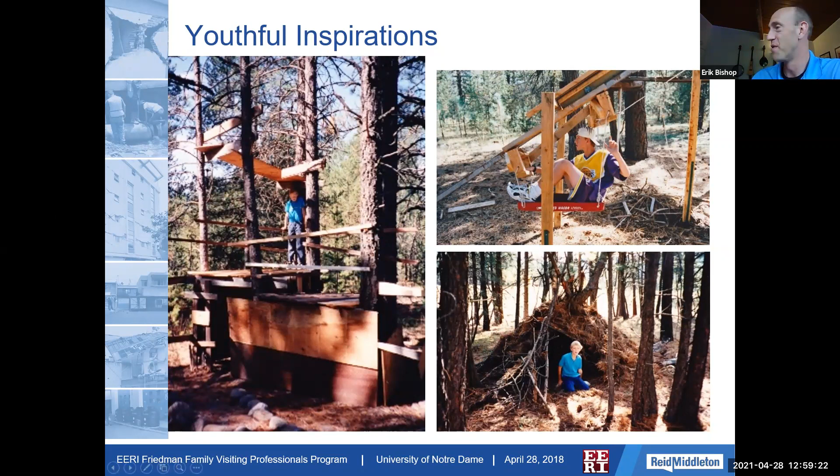It was actually way too steep and pretty dicey and dangerous, but the photo's cool - I was probably age 12. So I evolved to go into civil engineering in undergrad at University of Idaho, with a structural engineering focus, where whenever the topic of earthquakes came up, it was 'we don't talk about that here, you go to the West Coast if you're worried about that.'

So it was kind of interesting because they essentially, in my recollection at least, punted on anything post-linear behavior. It was a mind-blowing experience when I transitioned to get a master's at the University of Washington, where our entire focus - in essentially the context of everything we discussed, technical and conceptual - was really around earthquakes, dynamics, nonlinear behavior, ductility, et cetera.

And so I transitioned there to Reid Middleton, where I've been for about well over a decade, 12, 13 years. We're a relatively small employee-owned civil structural engineering firm. We do a lot of seismic upgrade work, as I think the bio illustrated, with 3 offices. If anyone is interested, graduating, looking for a job, feel free to reach out - we're definitely looking for people.

So that's really the evolution of how I got here, and most of these reconnaissance trips have been while I was at Reid Middleton.

The first one I'll share was actually while I was a master's student at the University of Washington, I had the opportunity to organize a team through some colleagues.

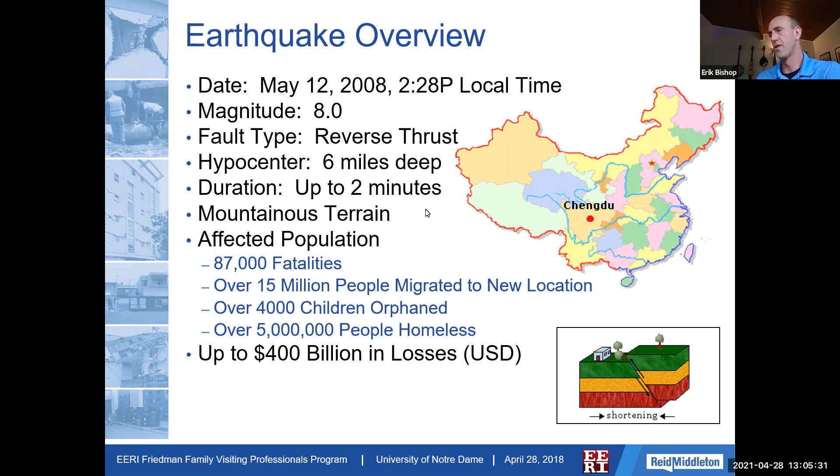So there are a couple of quick case study examples burned into my brain from that 2008 experience. One is a school building we saw, a typical 4-story middle school building with a rectangular footprint. It was a very representative type of building compared to other schools in the area. Constructed in 2006, it was essentially a brand new school building.

Sorry about that, my mouse or something just started going wild on its own.

Constructed with confined masonry, which is a system where they build the masonry walls and then pour in a concrete frame around it, a column and ring beam that confines the masonry. Even though it's unreinforced masonry, it actually has some energy dissipating capacity because the bricks are forced to rub against each other as it experiences lateral motion.

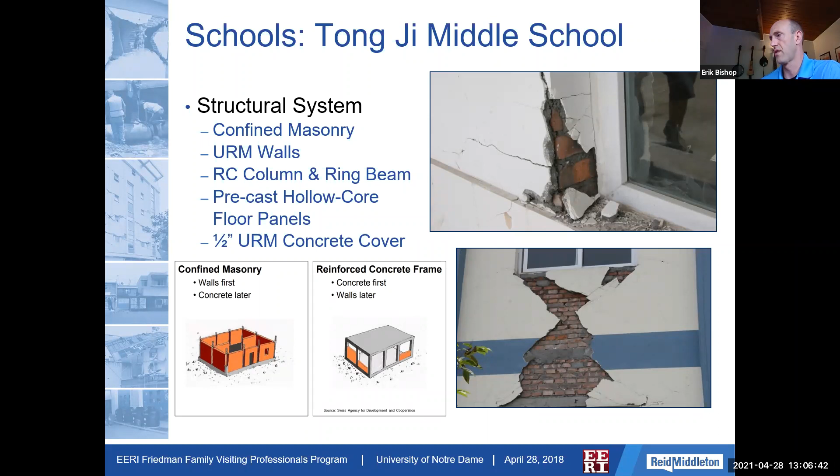So here's a type of construction they used for this building. You can also see there's some plaster on the surface that was added.

Essentially I would characterize this as a life safety level of performance. There's some shear cracks in the masonry walls, not unexpected, in these coupling beam sections, spandrel beams, and the masonry infill, stereotypical X-cracking. All the students got out of the building safely, certainly had some damage and a lot of repair work to be done.

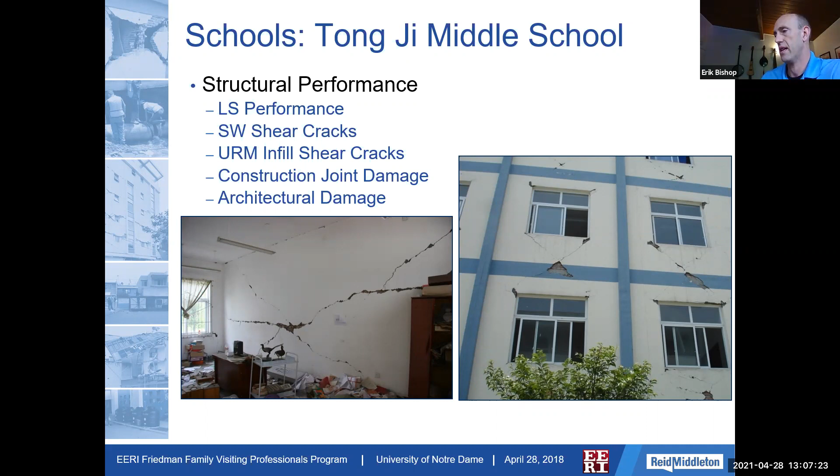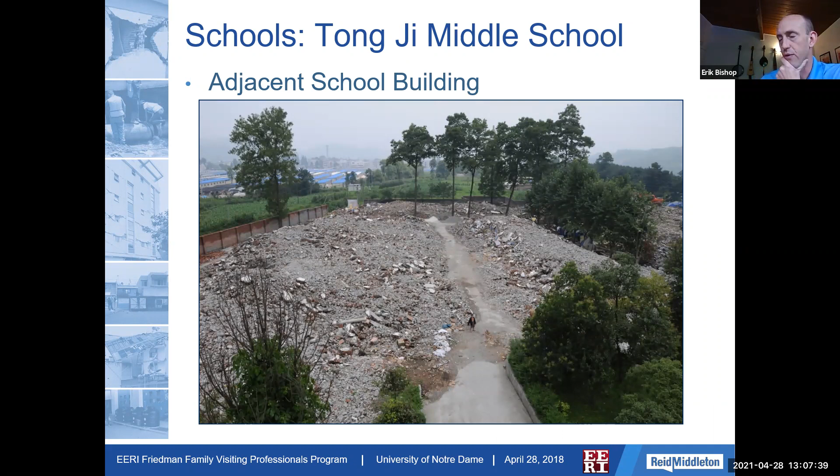Across the street was a nominally identical school building, and this is what it looked like. This was a purely unreinforced masonry building. As you can see, just catastrophic collapse. This was the case with a ton of different school buildings throughout the region, and the event happened to happen during school hours, which made it particularly tragic.

Their new design approach was based on some recent code requirements to confine their masonry, even though on paper the things I was learning at the time would be that this confined masonry building is still not the best earthquake resistant type of system.

These relatively cheap and nominal changes just had a profound impact on the performance of these two buildings juxtaposed, and this is extrapolated all throughout the region in similar cases.

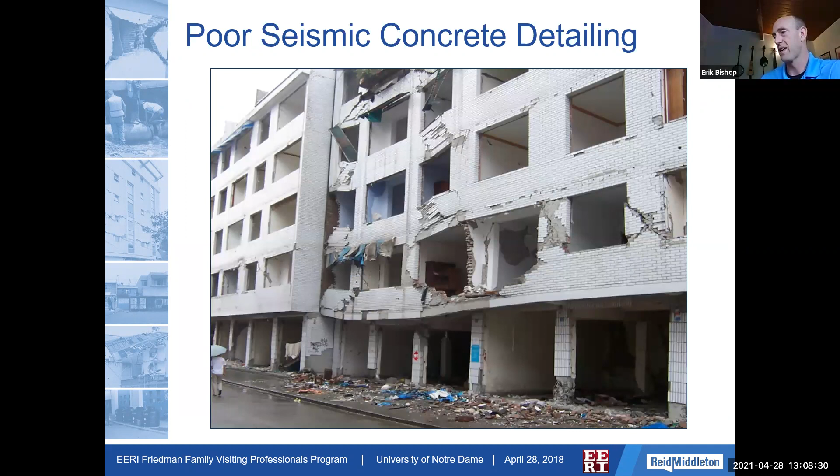Throughout this event, there's certainly a number of different cases of poor seismic detailing. You can see the non-confined column here with these really spindly confinement ties that quickly failed and allowed for buckling of the longitudinal rebar. Such a failure of this column is pretty common.

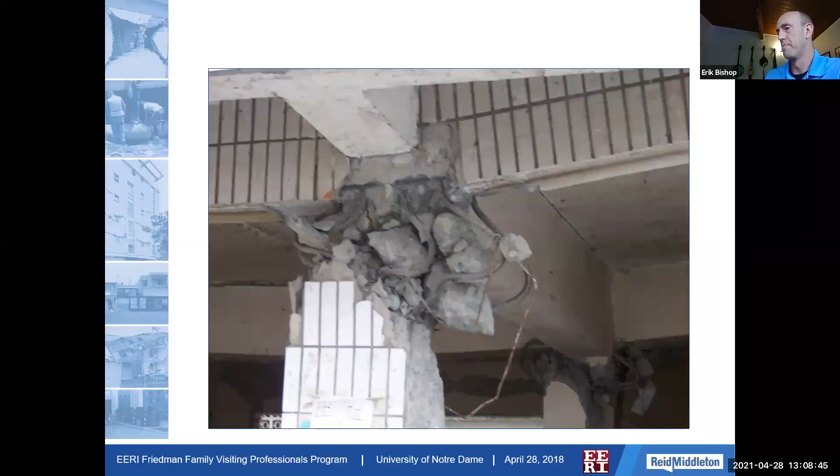Some hospital buildings that had unreinforced masonry infill, which allowed it to certainly be unoccupiable as an essential facility, was a pretty profound takeaway. There's also a lot of buildings that performed well.

We came to find out that just kind of the nature of a governmental structure, they concluded that they would have to wait for the federal government to come in to tell them it's okay to stay in a hospital. So they set up a temporary hospital facility in the parking lot, even though by our perspective, and granted we were coming from outside and totally unaware of context, et cetera, it seemed like they had a very usable hospital that was right there that they could have occupied.

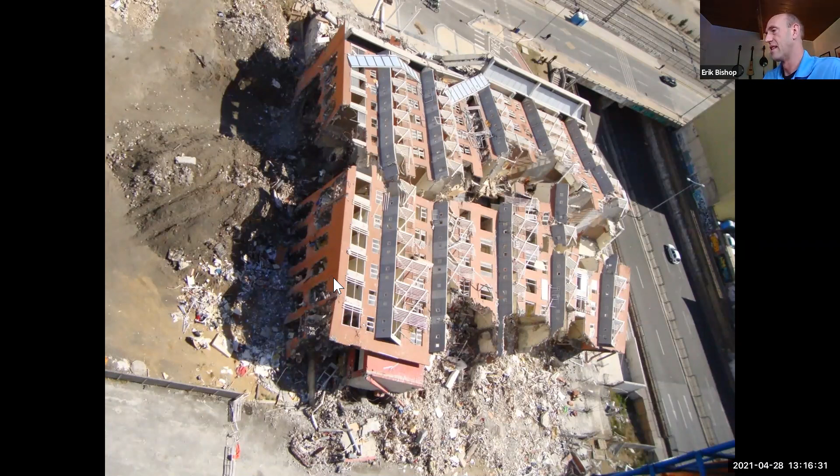Here's an elevation view of this building, and really the byproduct of inadequate tension anchorage, as well as compression boundary zones. Really, the columns embedded into these shear walls that didn't exist allowed for this catastrophic form of collapse.

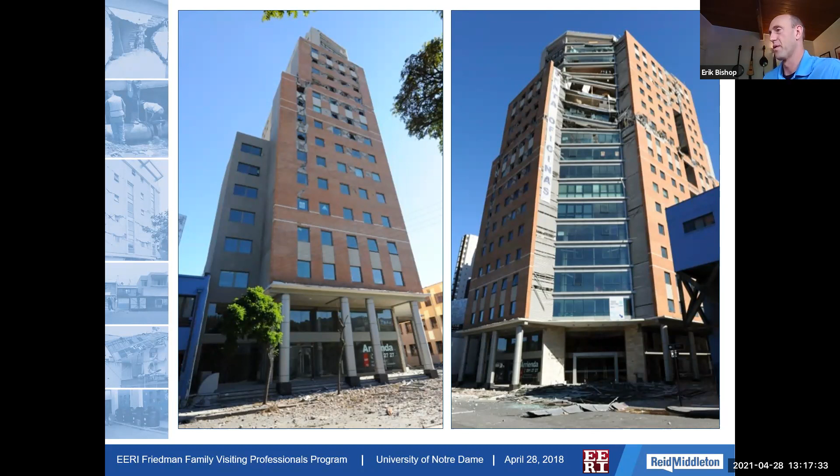I don't know if that's the case, but that's what we were told. And you can see the interstory collapse obviously red-tagged this unsafe, occupied building.

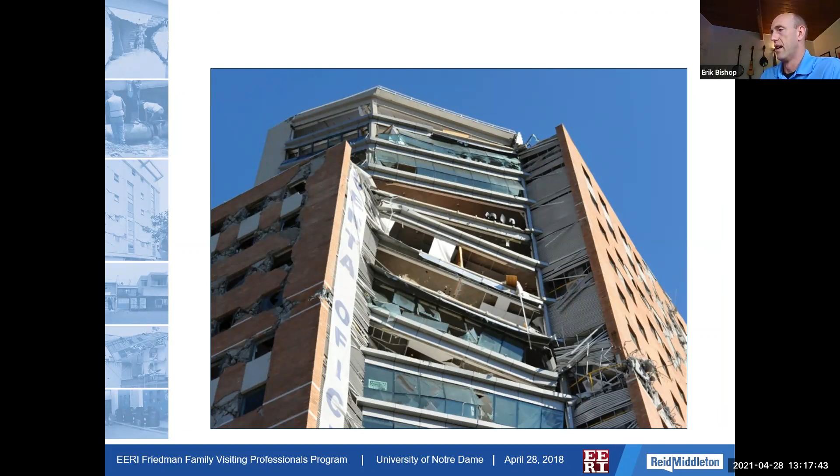I did have dreams about being in an earthquake after some of these events, and you can see this sort of standard office chairs that were kind of holding on by a thread, just like you can imagine. Fortunately, this event happened about 3 a.m., so office spaces were not occupied. But just the experience of that is hard to wrap your head around.

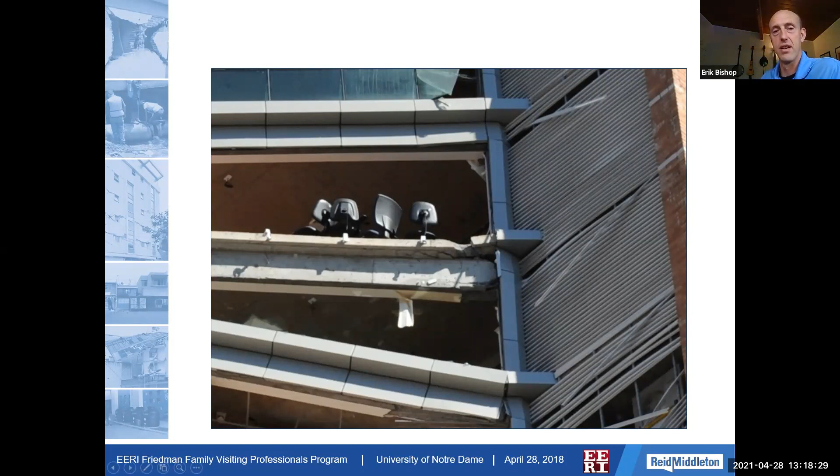I used to have the most nerdy dreams where I was dreaming that I was in an event, and I was imagining the nonlinear behavior, the reinforcement, like 'oh crap, it's buckling now,' and seeing the hysteresis loop while I was in it, which I'm sure is what you all dream about, but perhaps not everyone.

They've changed the architectural look of it, presumably to disconnect from all the news stories about this building. Here's one more high-rise building, really just because this has some interior photos to illustrate what I mentioned earlier. Again, an almost brand new building, concrete shear wall system, and essentially total failure - a shear failure here of this wall.

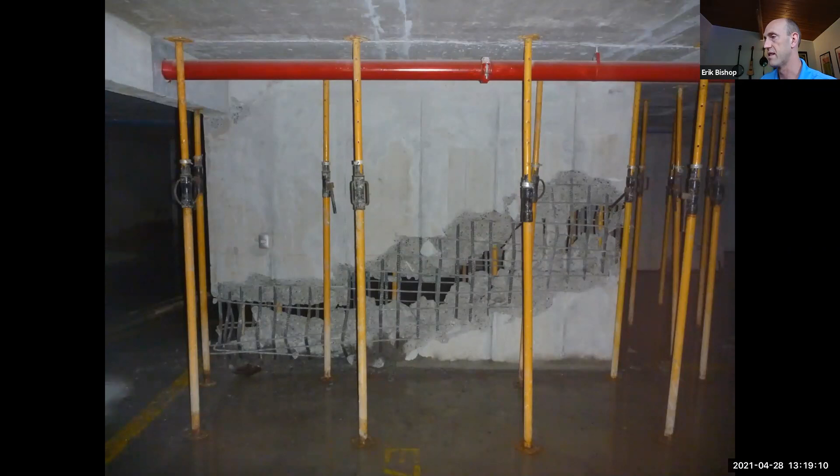And then see how remarkably slender the shear wall is, particularly for a high-rise building like that. And again, the lack of confinement reinforcement in the boundary zone - essentially the column at the end of that wall - that you would anticipate to see here.

Essentially what we learned is their code was modeled after our previous iteration of the IBC, I think actually the UBC at that point. It was nominally identical, except one boundary zone requirement that we had, for some reason - presumably political reasons - had been removed from their code. So that one piece of code resulted in scenarios like this or the previous collapses.

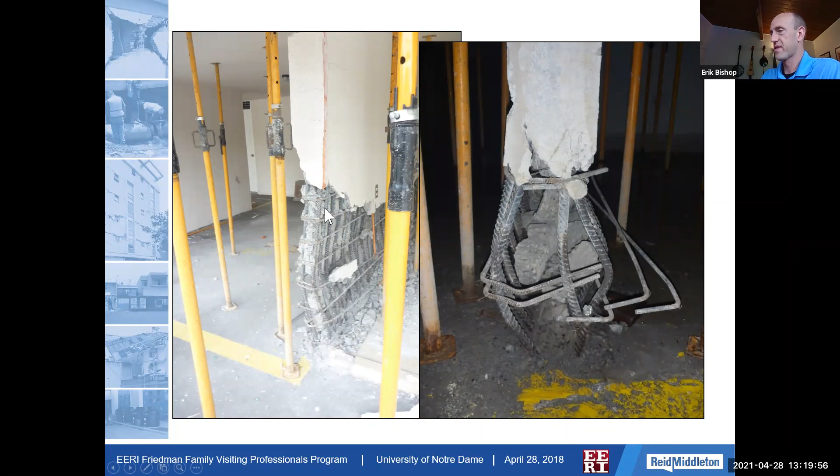But we were told by the chief surgeon that they had a major water pipe break in the upper floors of the building. That water cascaded down, and the ORs in this wing of the building were no longer operational - pun intended there. I didn't intend it, but no longer operational.

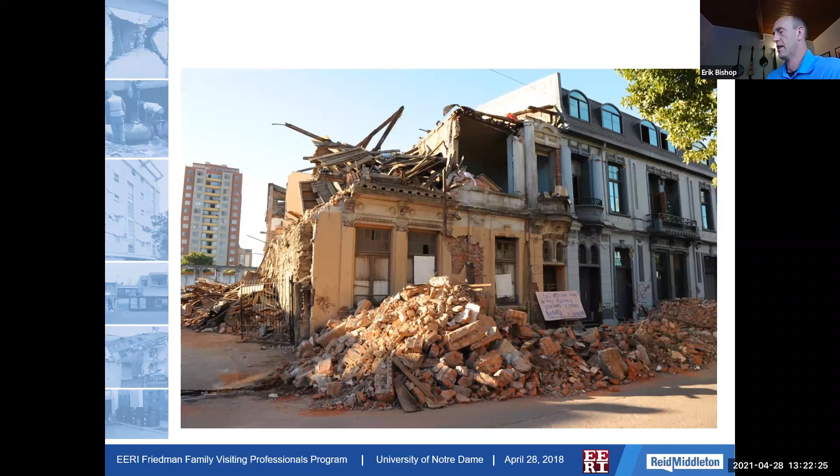Incidentally, as we were at this bridge a decade ago now, we considered going out onto the bridge to see more specifically what that failure looked like in the connections, but we elected not to - which was better judgment, as there was a large aftershock while we were there, and some of these spans dropped, whereas we could have previously walked all the way out there.

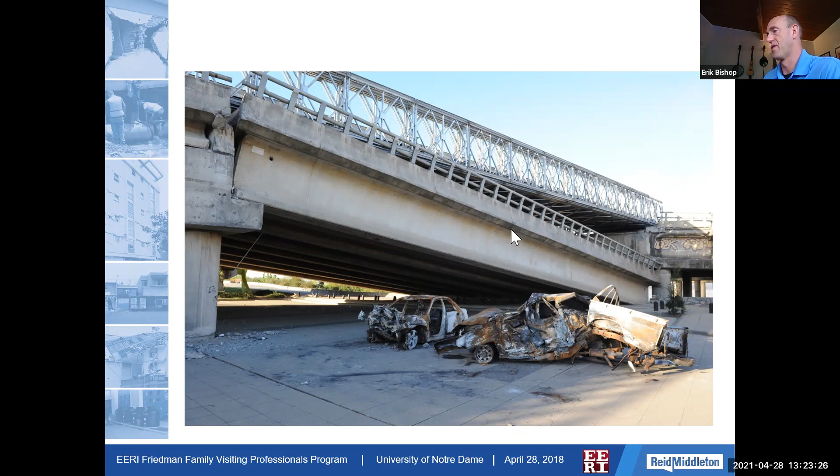So it was definitely a lesson reminder regarding just safety and being smart, not geeking out too much on the technical impacts. There was a temporary soldier bridge put up after this collapsed span of a pre-stressed girder bridge, and also some road failures. There were some really significant impacts to their transportation system in these major corridors, as you can see.

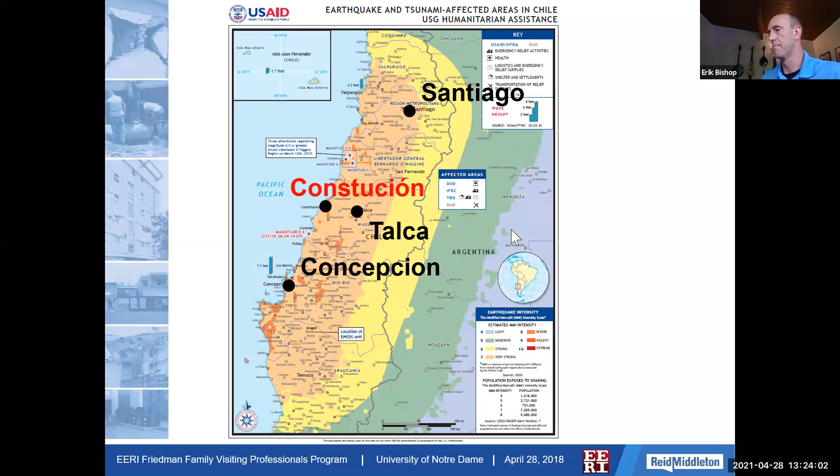For the Chile earthquake, the last topic I'll cover here is the area of Constitucion over on the coastline. Prior to this event, there hadn't been a major tsunami in a similarly highly developed area. Of course, Japan happened a year later, so we're really interested in that, especially for those of us expecting that in the Pacific Northwest region, from Oregon to Vancouver, BC.

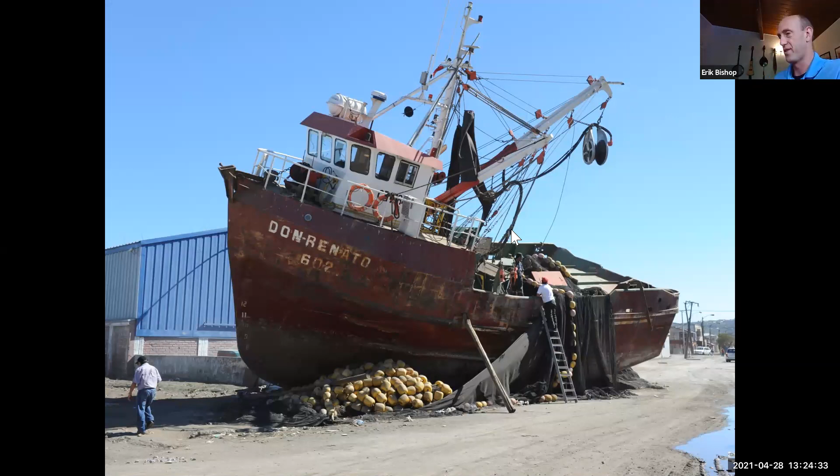Here's one of the port areas, and you see all the containers that were essentially strewn about after the inundation zone impacted this whole port region. Walking around, it's not uncommon to just turn the corner, run a street, and see a large boat like this one just sitting in the middle of the ground, having floated its way in, which just feels like you can't believe your eyes when you see something like that.

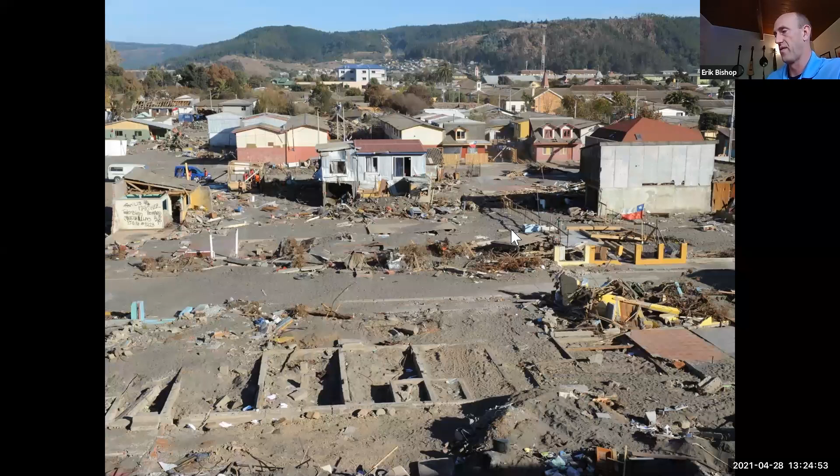A lot of the really vulnerable communities that had single family housing adjacent to the water in the inundation zone either had their house entirely swept off its foundations, as depicted by the footprint here, or were just so severely impacted that there was damage beyond repair.

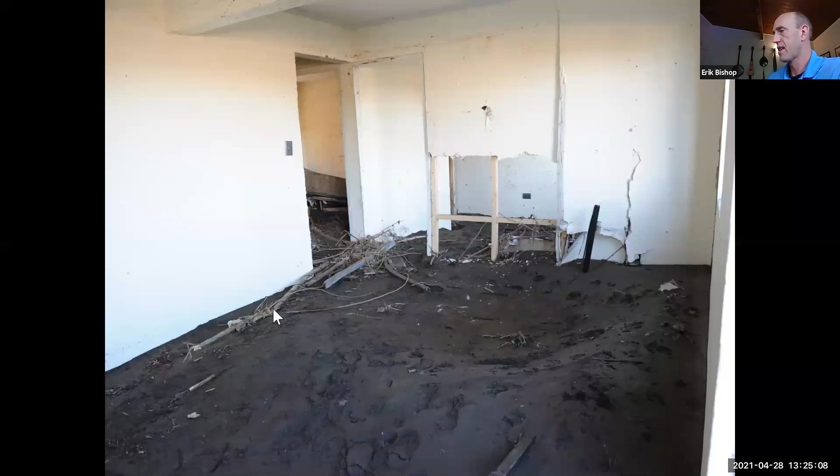Here's examples of all the debris that gets dumped into this first story apartment building. It gets dumped in these spaces, and it's pretty nasty if you think of all the different types of biohazards and chemical hazards and contents that get caught up into that inundation and then dumped in these spaces. So it's far from being an occupiable space.

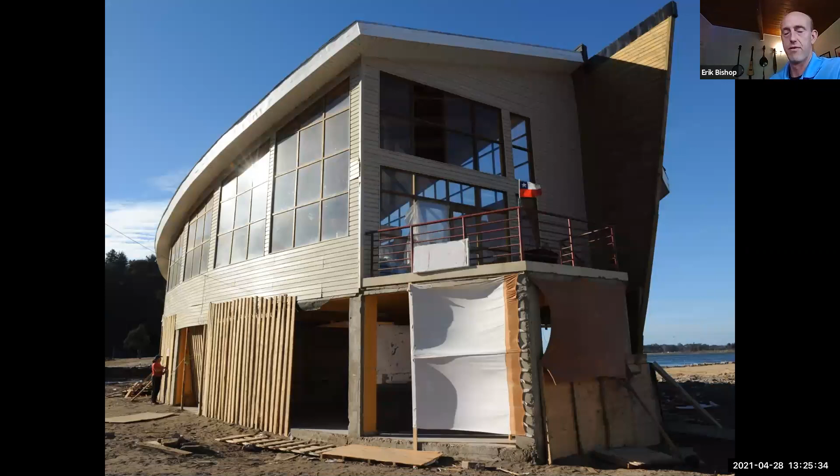The areas that did perform, or were in better shape, were structures that had a concrete moment frame on the first floor and then wood frame above. For this event, the inundation was around 7 or 8 feet. This happened to be like an area where you'd rent kayaks and things of that sort, and it ended up being really a community resource as all the food and effects distributed after that event were utilizing this facility that had that type of structure.

And again, sure enough, coming back 7 years later, a lot of the homes in this community were constructed with a similar approach where there's this concrete moment frame, and essentially the whole first floor was either like a garage type space or had walls designed to be blowout walls in case a similar event occurred, so that people could have an occupiable second floor, which is really interesting to see those lessons being applied in new construction so quickly.

Also, here's a municipal building area nearby, where in constructing this 2013 municipal building for the local municipality, they ended up creating this access to the roof with the intent of it being a community accessible vertical evacuation structure. You can see these ramps and stairs that allow you to get to the roof of this building, with a giant footprint about 3 stories above, to allow for vertical evacuation.

I'm not sure. So similarly, a year later, this large magnitude 9 event occurred in Japan, called the Great East Japan Earthquake, as you probably recall in the news. A very large area was impacted both from the ground motion as well as the tsunami. I won't go into a ton of detail, but Japan's probably number one in the world in terms of earthquake preparedness.

They're much more active at installing innovative systems like damping systems and base isolation. Not all buildings performed well, certainly, but just as a general statement, it was pretty encouraging to see the level of performance of their structures from the ground motion.

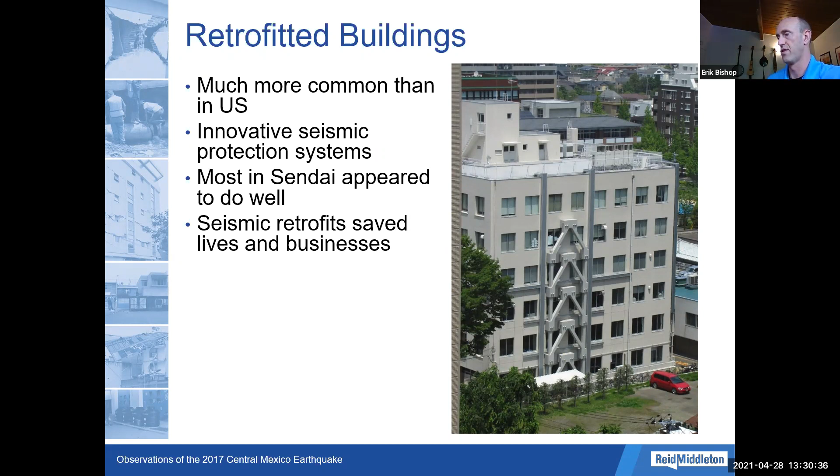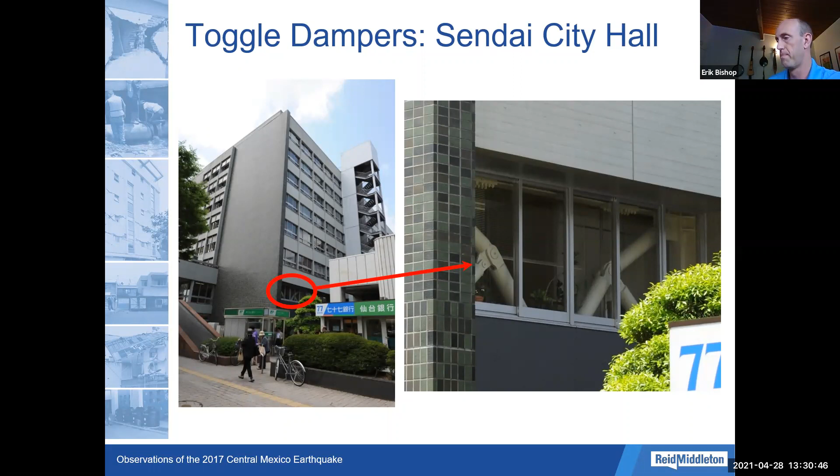Here's some examples of toggle configurations of fluid viscous dampers being installed in a municipal building in Sendai. Base isolation is much more commonly applied. You can see in this corporation building, this video is pretty cool to see the differential movement of essentially the building staying still while the ground is moving relative to it.

Really the big takeaway from that event was just the unprecedented magnitude of the tsunami inundation and run up. And your eyes aren't failing you - these are magnitudes of meters of the height of the run up in these different areas, which is pretty hard to prepare for.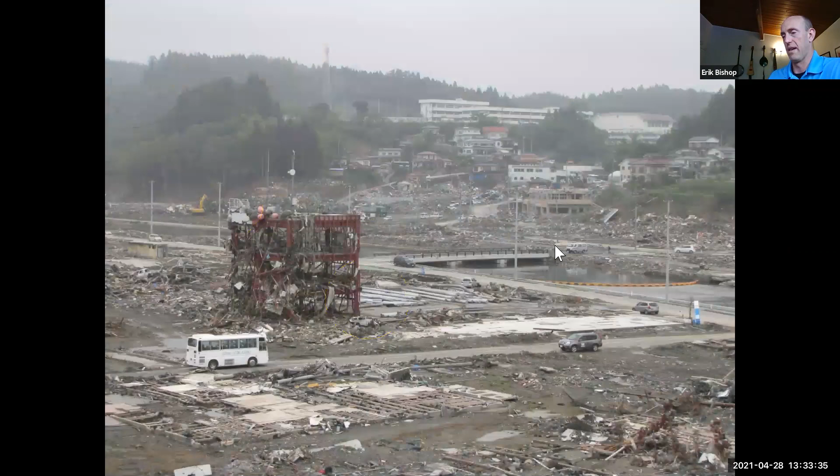Fortunately, he and a number of people survived. Unfortunately, obviously, many people - I think on the order of magnitude of 10,000 - didn't survive the tsunami. This is that structure afterwards. So a lot more I could go into, but Japan, generally speaking, is one of the most prepared nations in the world, and their preparedness saved lives.

And even this magnitude 9 event, which seems... you hear people talk about the big one out here, and they act like it's not something we can prepare for, but in terms of the structures, preparedness for the ground motion generally performed relatively well. A lot of their proactiveness in implementing these seismic protection systems really paid off. And because they get ground motion so often, the public demand a higher level of protection, and in general are willing to pay for it.

We've seen examples of the cheap hotel here that says we have HBO, we have free Wi-Fi or whatever. They'll have hotels that say we have a base isolated building, and people pay $7 more for that hotel night, just knowing that they have that level of protection. So, as a result of the frequency and magnitude of what they've experienced as a community, it has been incorporated into the society and culture in really impactful ways, in the ways that they demand it.

And then certainly vertical evacuation structures for tsunamis, they have to be tall enough, well designed, they have to be locally accessible without requiring people to get in a car. That's something that we're trying to learn from.

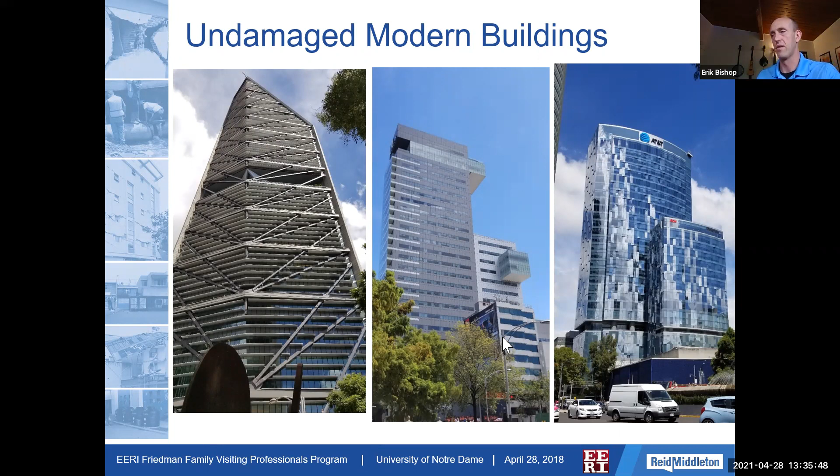But if you go there today, it's a relatively modern city with buildings that look like this that were essentially undamaged. Also a historic city with areas that look like this. This is a couple weeks afterwards.

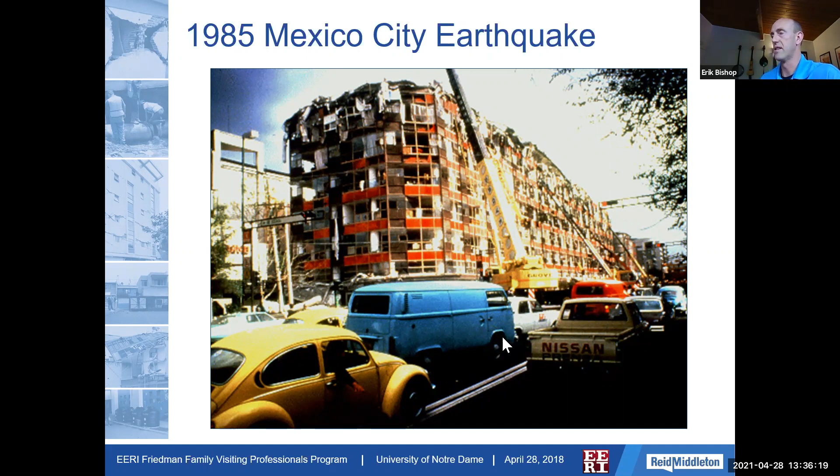And a lot of that was because they had this major event on September 19th, 1985, where the dynamic frequency of that historic lake bed impacted a certain type of building, certain building height, but it equally impacted society in the way that they prepared. And so they have an annual drill every year on September 19th. 32 years later...

Coincidentally enough, on September 19th, after they've had their morning drills, they have this magnitude 7 event, roughly 75 miles from Mexico City, as well as these other towns that I don't have a ton of time to go into today. They had a couple of pretty significant collapses, 38 collapsed buildings, 2,000 damaged buildings. But that's in the context of a large metropolitan area of 25 million people, give or take.

You can see some of the specifics here, but the really remarkable thing is you don't know where the historic lake bed is when you're there. You're just driving down a busy street, but when you start overlaying where the historic lake bed was from when the Aztecs showed up relative to the impacted areas, there's all sort of amplification on the boundary of this lake. Imagine a bowl or a bathtub full of Jell-O. If that Jell-O is shaking back and forth, once it hits the rigid boundary of the bathtub, that's where these amplifications occurred.

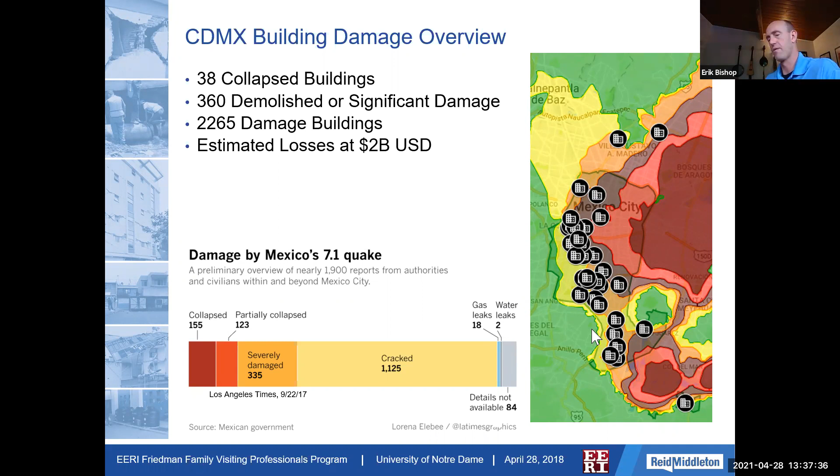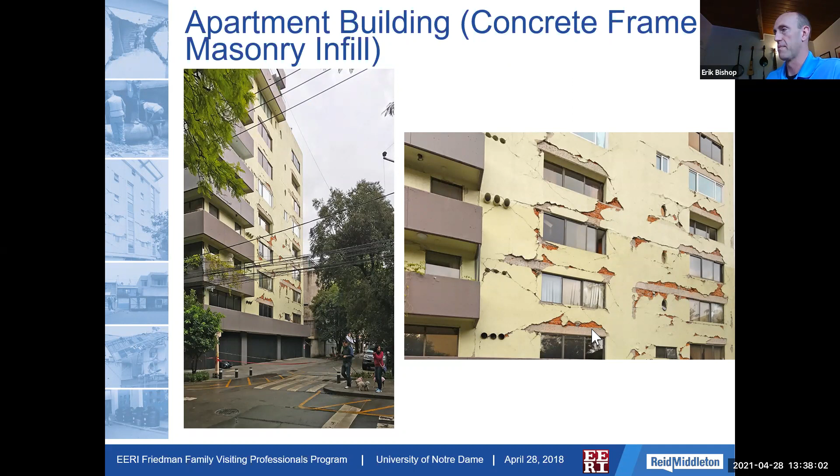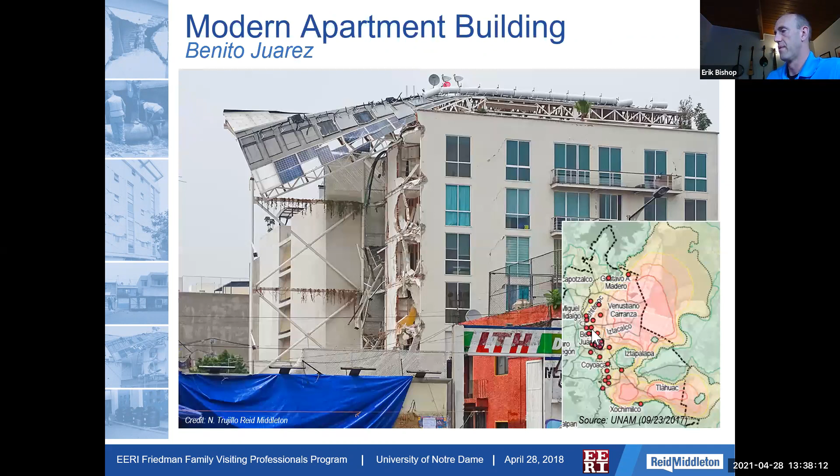That's really where a lot of the damage was concentrated. So you probably saw in the news some of these really catastrophic scenarios, like these couple apartment and commercial buildings that collapsed. There's a lot more buildings that looked more like this that were unoccupied, but displaced people. So if they didn't have family to move and live with, there's a huge issue of where do these people live now, and then how long does it take to repair and get these buildings occupiable again for apartment buildings and commercial buildings, and all the business interruptions and societal costs that ensued. But the main thing to take away is that's a relatively small percentage of buildings that were impacted in this very large, expansive metropolitan area that makes flying over LA look like a medium-sized town.

So a couple of takeaways from Mexico City: lake bed effects were significant. There's a whole number of impacts to the water system and who that disproportionately impacted, as a result of the more than 1 foot of settling that often occurs in a typical year in the area. There's a whole presentation we have on water utilities that we've been learning about, but really it was localized damage.

But what we had an opportunity to partner with and learn about was a lot of community organizing, doing ATC-20 inspections, the local CICM, the organization of the College of Civil Engineers. A number of the students we met were taking really impressive leadership roles in organizing these post-earthquake safety evaluation efforts. There's millions of other examples of community organizing we observed that were pretty remarkable, and I think it's a worthwhile example to look into of what real world resilience looks like.

So the media probably didn't cover it as much as another large earthquake would have in the United States. But they had some pretty significant impacts to some of their hangar buildings, etc., and I think multi-billion dollars of losses from this military installation. They're still in the process of — there was the initial response phase of responding to the event, damage assessments we assisted with, and there's a recovery phase, and now they're figuring out and executing repair and seismic upgrade projects.

So I think I only have a couple minutes left. The last thing I want to share about was some work that our housing group did with this idea of resilience reconnaissance. A lot of the traditional, quote unquote, reconnaissance has been understanding how facilities, buildings, structures are impacted from a technical standpoint. Frankly, I think a lot of those lessons have been learned over the last generation or so and have been embedded into our seismic design code.

And so we know unreinforced masonry buildings are vulnerable. Studying that again is impactful, profound from an individual standpoint, and really empowers new generations of engineers on the reason why we do what we do. But in terms of technical learnings, a lot of those lessons have already been learned.

And so the vision is to evolve this idea of reconnaissance into trying to understand resilience, which is super complex and hard to wrap our heads around, and hard to measure as well, in part because it occurs over time. So there's this sort of temporal aspect.

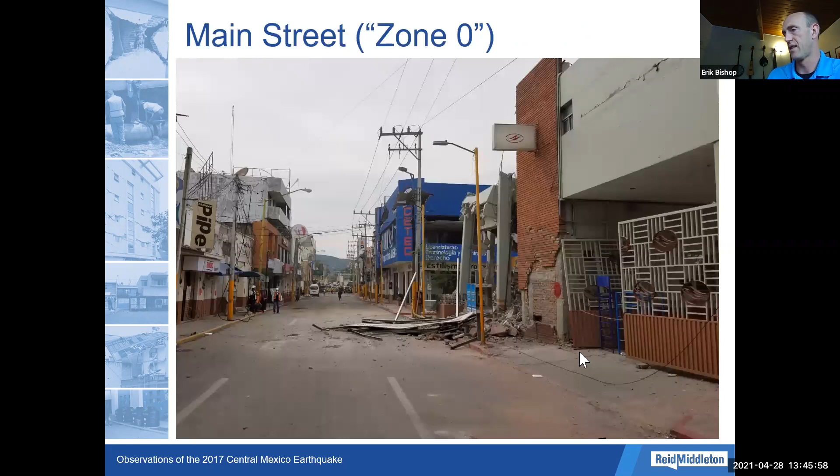I won't go through the details right now, but it was pretty impacted in this town of 70,000 people. We saw communities coming in and intersecting with the political context, and came up with this whole storyline where the politics, the infrastructure of how they organize their land titles, as well as events and outside organizations coming in, all intersect in this sense of the storyline.

Just to wrap up here, since I'm at the end of my time, reflecting on my first third to quarter worth of career and seeing these earthquakes in real life, juxtaposed to my real day-to-day life of actually designing retrofit buildings, studying them, etc., as we do as consulting engineers.

It's really the emphasis that the work we all do as a profession really matters, and the detail that we spend so much of our schooling time learning about, and our careers working on enforcing, really matters. These lessons from these events have historically shaped the profession, shaped the codes, our understanding of performance, from structural systems to now evolving into discussions of functional recovery and resilience, and also impacts careers such as my own, and the way my whole understanding has been informed by these firsthand observations.

It's really easy to kind of geek out and get sucked into that aspect of things, but we can't decouple that from these communities that are really impacted. As we talk about resilience reconnaissance, one of the things we really focused on emphasizing with our housing group was how do we do this work in a way that has reciprocal benefits to those impacted communities through partnerships with people on the ground.